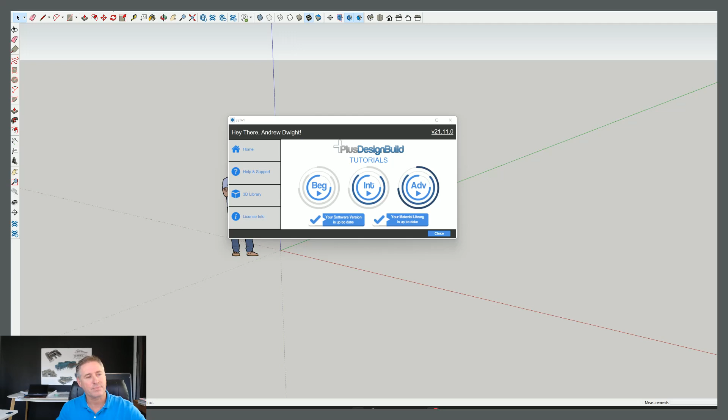Let me turn this mouse on so you can see. You're going to see this screen, and it will say your software version is up to date. We do have a new release coming out soon, which may not be before you've started this course. However, when you do see this, click it, because it's going to give you a whole heap more functionality to enable you to quote faster and understand your projects.

Essentially what PlusSpec does is we virtually build the building on a computer so that we can look at how it's built, why it's built, and then quantify what's inside of it, right down to the nails and everything associated with it. I'm going to show you that quickly, how to get some help, and how to improve the experience of doing Cert 4.

Building is a tough game. It's rewarding, guys, but it's tough. And the better communicator you are as a builder with your clients, the better your results will be, and at the bottom line, your net profit margin. Net profit is after you've paid for everything, your labor, your own wages, everything like that. Net profit is what kept me building.

I love building. I was reasonably good at it. I built some beautiful homes. However, if I wasn't making sufficient cash to do it, I would have had to go and get a job elsewhere. None of us want to go and work somewhere else if this is what you've chosen to do.

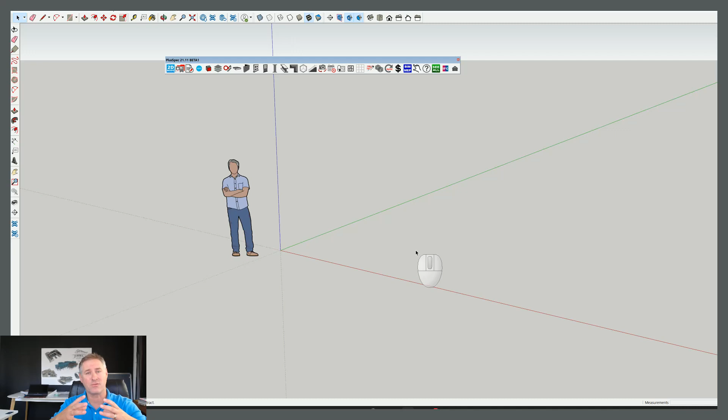Now these are all going to help you. Some of them will sync with other software like Xero to do your tax. Some of them will download resources according to the state. You guys are in New South Wales, so you would go through the instructions and ensure you have New South Wales, Australia selected. That will bring in a whole heap of suppliers, for instance Austral Bricks, WeatherTex, Stramit Roofing, all of those products are going to go in. This means you can see what colour goes where, show your customers what colours go where, and more importantly, quantify real products that you can actually purchase.

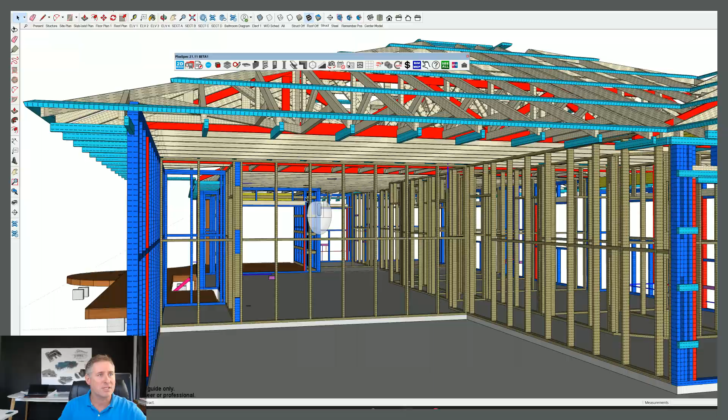Also inside here, you'll notice this question mark. If I click it, it brings up that initial screen. There's help and support when I hover over it, and if I click it, it opens up some FAQs and so on. However, there's a demo model. If I click that demo model, it loads a model for you, essentially a single story house typical of New South Wales construction. If we look at it from a structural standpoint, you'll notice it has all the studs, the decking, and everything required to build this home, including ceiling fans.

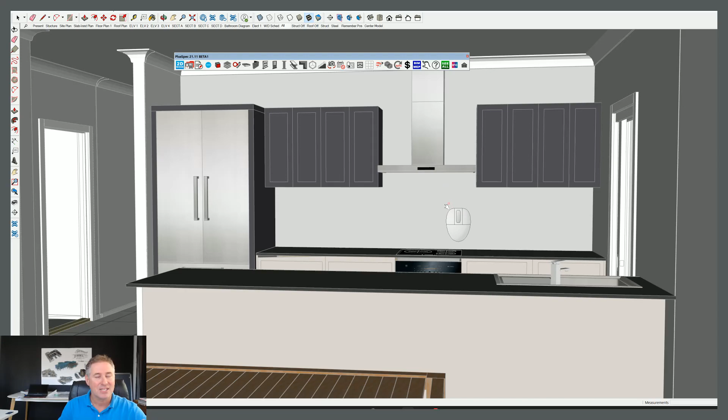From a customer's perspective, you can walk them through homes and have a look inside. You can click on things and change things around, taps and range hoods and all of that type of stuff. It's kind of cool, but guys, when you do that, it's actually changing the estimate as you do it. So keep that in mind.

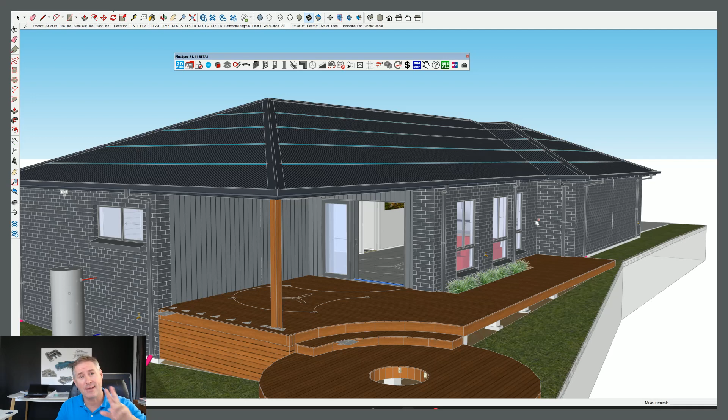You can get to this type of detail, and guys, I deal with a lot of students around the world, and usually for someone who's never used 3D software before, to get to this level is around about 2 hours a day for 2 weeks. The more you use it, the better you get at it. It's like learning to use a tape measure and make sure it doesn't fold up every time you use it, or driving a manual car. Whatever it is, it's practice.

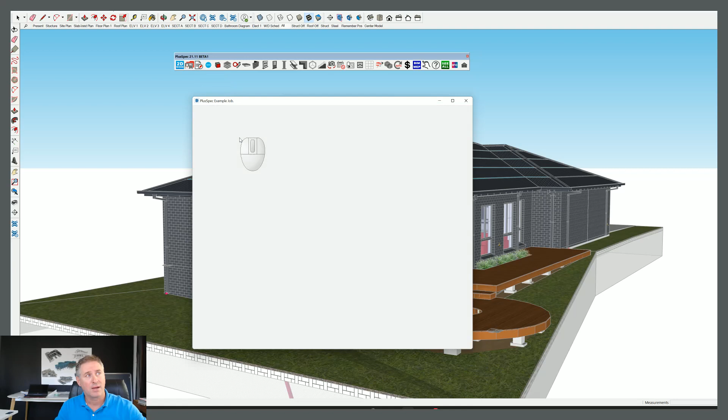However, this practice will go towards building you a better business, making you a good quantity surveyor, so you can do a full bill of quantities from this model. I'm going to click it here. It's generating a takeoff. It's going to go through and tell me the length of every single stick of timber to cut, but it's also going to give me order lengths to order from suppliers. It's going to give me how many bricks are in there.

It's going to give me how many windows, and you'll notice here it's given me a whole list of products. If I click on masonry, inside of masonry, it's going to tell me how many bricks I've got in there, how many products, how many bags of cement I've got. Everything that's going to go through there is quantified for me, how many tons of sand.

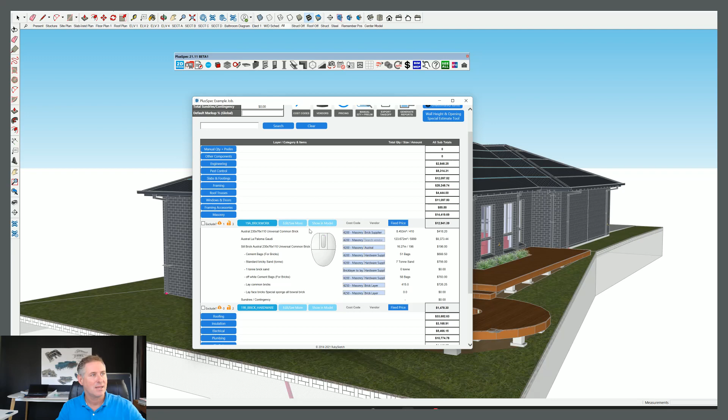And if you wanted to go in and edit things, you can go in and edit, and you can choose prices, you can add prices in. You can add suppliers. So over here, you can import your own suppliers, type in your own suppliers' names, and you can associate things called cost codes, which will go through to your Xero or QuickBooks or whatever it is you do. And this will organize information so you can start to create purchase orders for your subcontractors and for your suppliers.

And the reason why we use purchase orders instead of ringing up Bob the bricklayer and asking how much to quote that job is it's a piece of information that is a document between you and a subcontractor. And that subcontractor can agree to the purchase order, and it can make you certain that you're going to get the job done for that price.

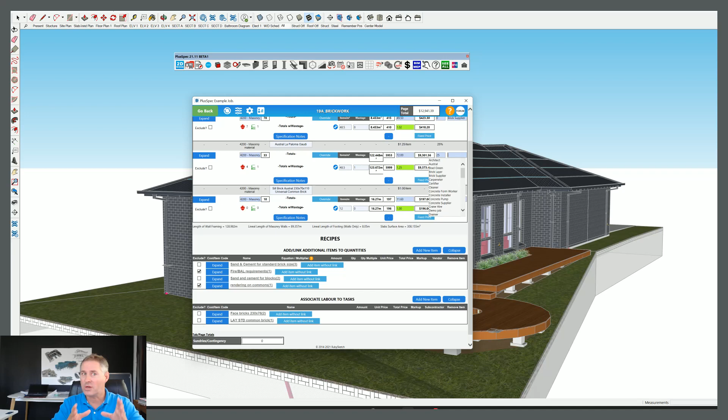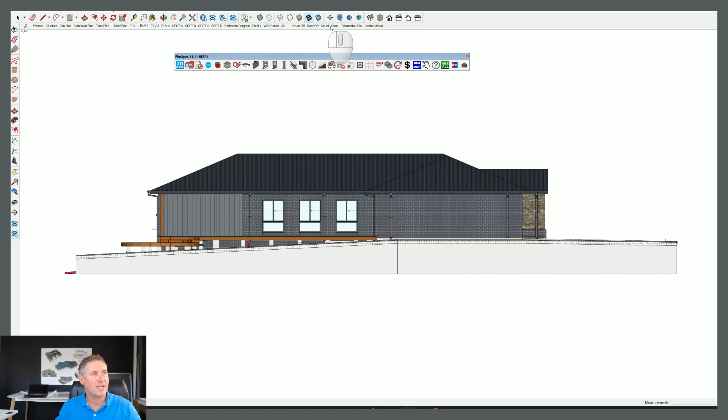Guys, it's a very comprehensive piece of software. It gets right into detail. These things at the top, they're called scenes. If we click on a scene and we click on multiple different scenes, you'll notice it's starting to show us this model in detail. Right, elevations, a whole heap of things, black and white or in color, doesn't really matter. And right down to, say, bathroom diagrams, right?

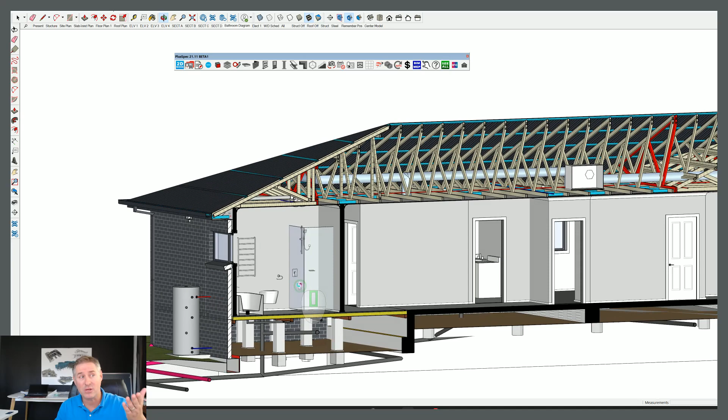And it helps you highlight, it helps find problems before you start to build. It helps you solve those problems to ensure that when you're actually building projects for clients, when you do get your builder's license, you can charge them for a quote because customers love to see this type of stuff. But you can also be certain that the price you give them is the right price. Once we get to the right price, we can deliver value. Guys, building becomes a hell of a lot easier than what it has been before we developed the software.

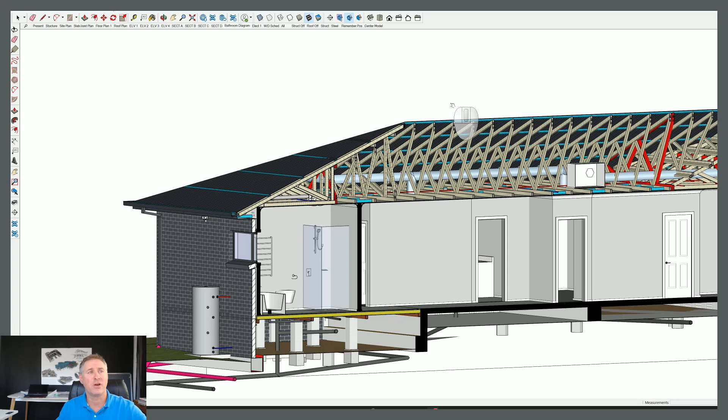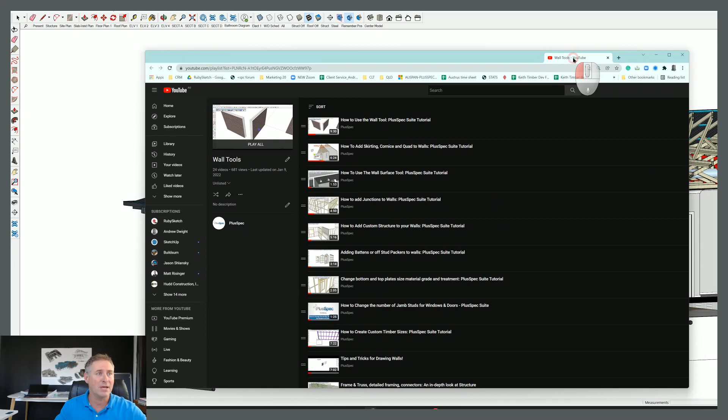Guys, if you've got any questions, you can actually ask them in YouTube. There's a PlusSpec YouTube channel. There's also a RubySketch YouTube channel. And every single tool inside of the software actually has its own help. Right, so if I click on my wall tool, you'll notice at the top here we have a question mark. If I click on that question mark, it's going to take me directly to YouTube and show me how to use that tool. It saves you going and looking through a whole heap of long instruction manuals, where basically as soon as we click it, it's going to open up a YouTube video menu, and it's going to say how to create walls, how to add junctions in walls, how to do everything that you need to do.

And that's the key to actually ensuring that what you're going to deliver and how you go about learning to deliver projects will be fruitful for you in the future.